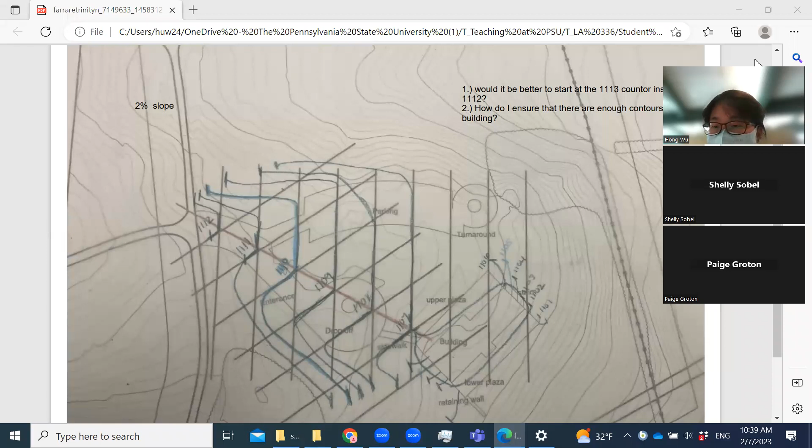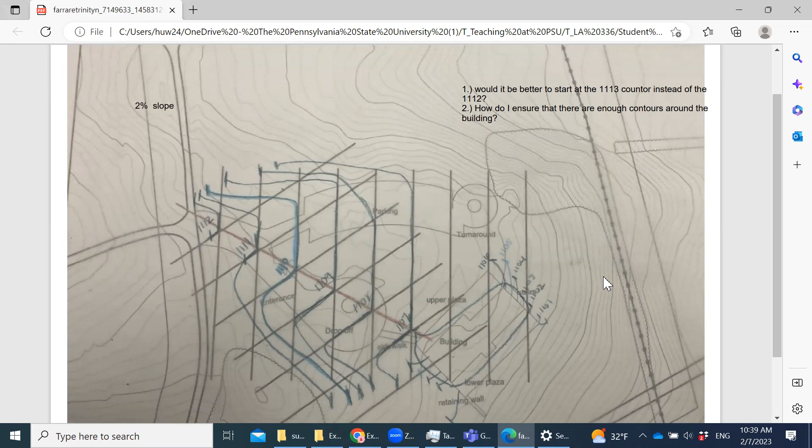Let me record. Then, sure. All right.

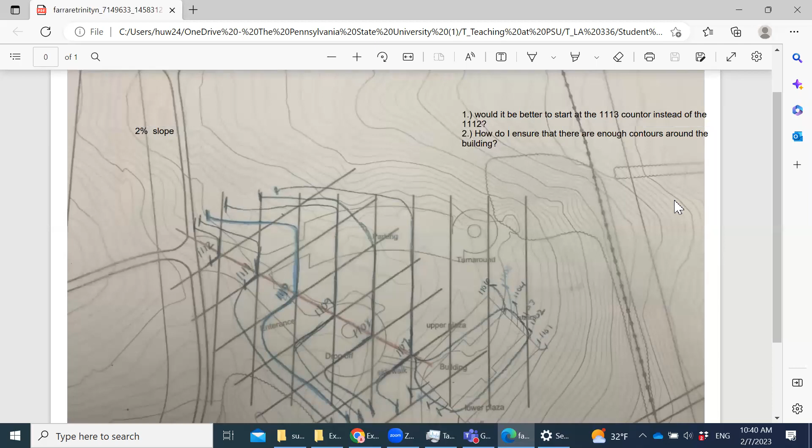Would it be better to start at the 1113 instead of the 1112? How do I ensure that there are enough contours around the buildings? Okay, so I want to try to understand first where... let me confirm that this is... did you start changing directions here? Yes, okay.

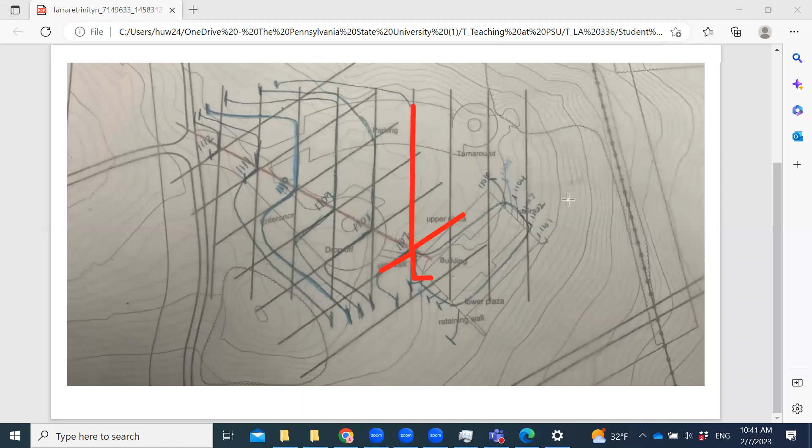If that's the case, and this is 07, you would have 97 at the bottom here, right? So the next contour off your lower plaza would be 96. So we'll see if 96 is over here. This is 95, is that right? Or that's 0.

If that's 0, then you actually need to connect from here to a 96, which is not a big issue, but this also means that you can raise your FFE so that the bottom would be higher, closer to the original 97 or 99, 98 over there, right? So that means, yes, you could make this 13. Starting with 13 would work.

Yeah, so then you would have 0, 8, and 8.5, 98.5 at the bottom here. Then it will be easier to connect to, as your top FFE, you have 0, 8.5, and bottom would be 98.5. Yeah, that's easier. Okay, so that's that.

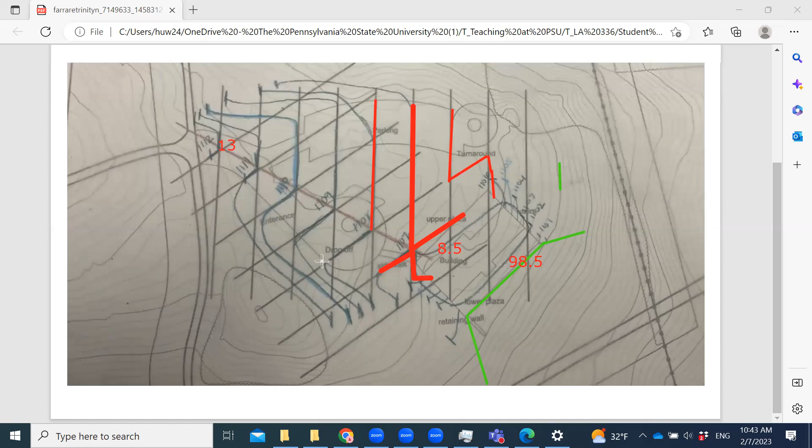That's correct. Then this goes like here, goes to here, there, and here. Well, once you get down to the driving aisle, it's okay to change directions, okay? But it's also fine to keep the ridge that you have right now.

When it turns out too difficult to connect to the original contour, you can be more flexible on the driving part, not the parking part. On the driving part, you can create a slight slope so it all slopes to one side. You don't necessarily have to create a crown in the middle of the road, but you don't seem to have this issue. All right. So the next problem is to connect to the correct contour.

I think we need to read the 12 here a little bit more carefully because there are two 12s. Now, if you remember in Stuart's example, there are two ways to connect 12 over here. This is 13. You have to close 13 for sure to make more room, right? This is 13 here. Yes, that's 13 here. So you could connect 12 back to this line.

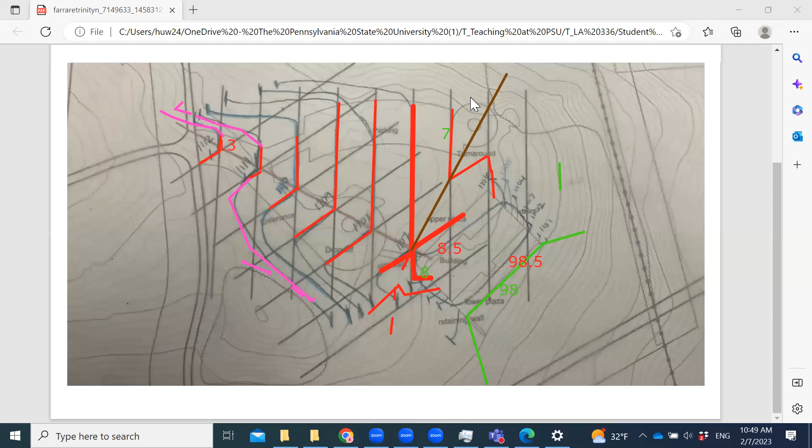And then it depends on whether or not you're getting down. Well, if the last line is over here, you don't have any other contour. So the 7 contour here is the last contour you would have on your parking lot, because you can see you don't have anything crossing, or you don't have enough space to create another 6 contour over there. So you don't have 6 on your turnaround.

Your turnaround is on a steep area and it's very close to the vegetation. So very likely you'll have to do some adjustments, like, okay, I need to round these. Let me change to another color. Need to round these. And then you have a center line in the middle like this, and your circle will need to align with your center line.

The turnaround here will be something like this. The extension of this line will go through the center of that turnaround. And this will also help move your turnaround away from the very steep area. Honestly, I think it's still pretty close to the vegetation.

So it might mean that everything here would need to rotate in this direction. You have a lot of space in between, so I'm not too worried about the possibility of rotating. You should be able to rotate it off the steep area. Okay. That's pretty much what I can comment on this submission. I think in terms of progress, this is appropriate.

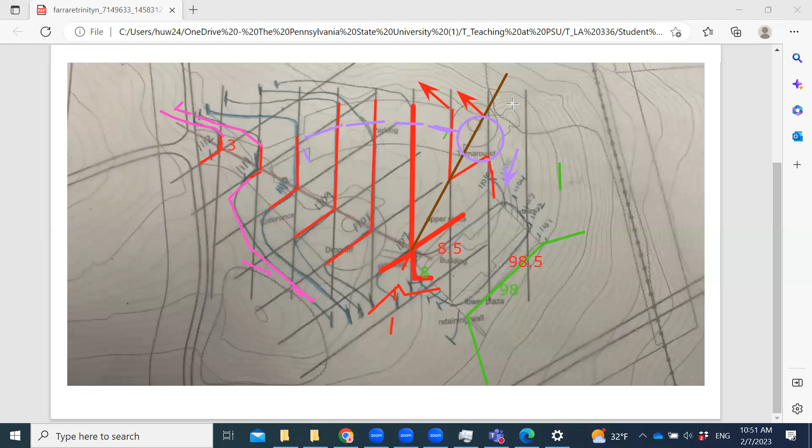Although a few more contours could be connected off here, right? In these areas there are still conflicts between existing and proposed, so those need to be connected. Always be mindful of the direction where the contours hit the wall. It should be like this instead of this way, okay? Because you're going to drain water onto the wall if that's the case. All right, so that's that.

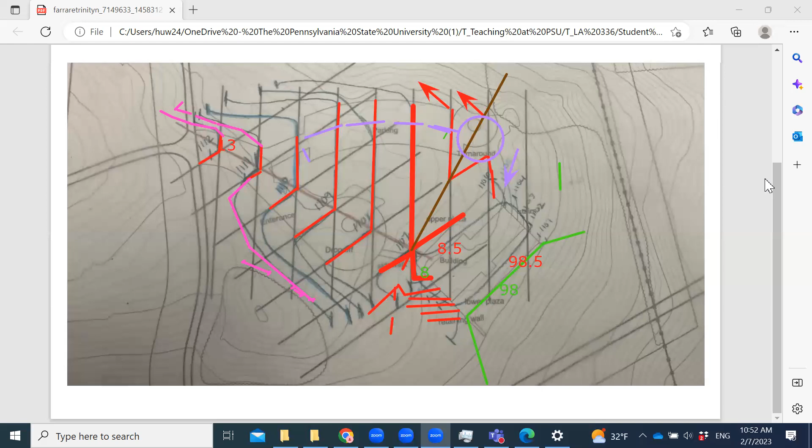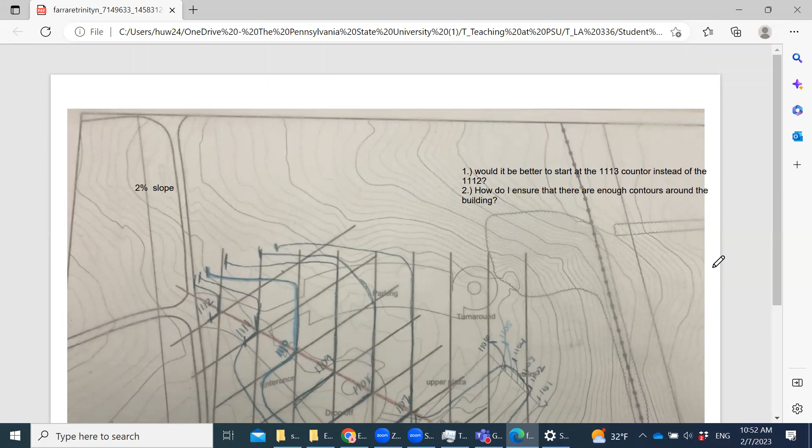Let me clear. I did save a screenshot here. Let me clear and then scroll up to see your remaining questions. I think I answered both of them. Anything else you want to go through? Okay. Good. All righty.

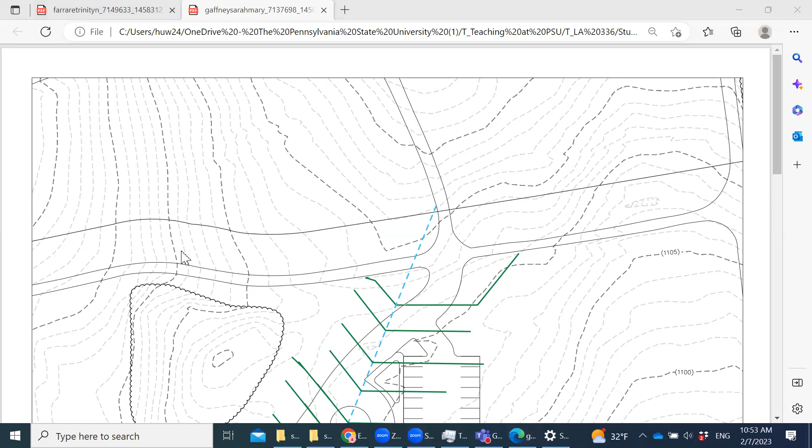So my next submission is Sarah. Is Sarah online? Let me go see. Oh, the other Sarah, yes. Let me see if she is in the main room. Well, not here yet. Trinity, if you can text her to let her know. Okay, thank you. Paige over here, I think you're online. I'm here. Yes.

So if you were here when I reviewed Trinity's drawing, we talked about how you want the top FFE to be relatively high, so that you will be closer to the original contours once you get down to the bottom of the backyard, right? So if your top FFE is 1104 and your bottom FFE is 94, it's going to be very hard for you to connect to 94 once you get to the backyard.

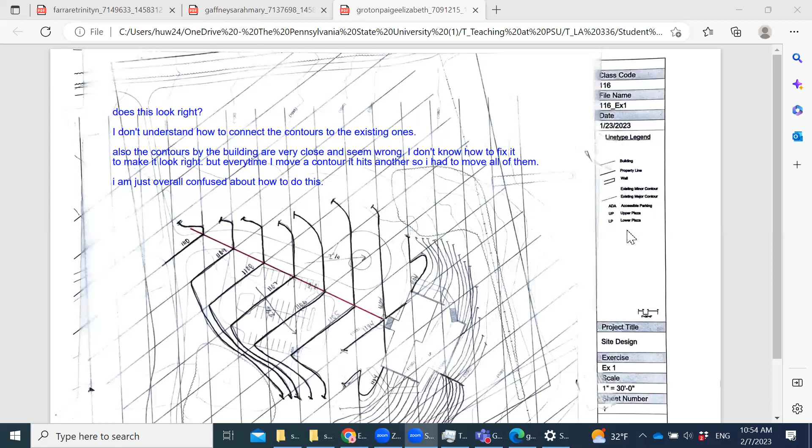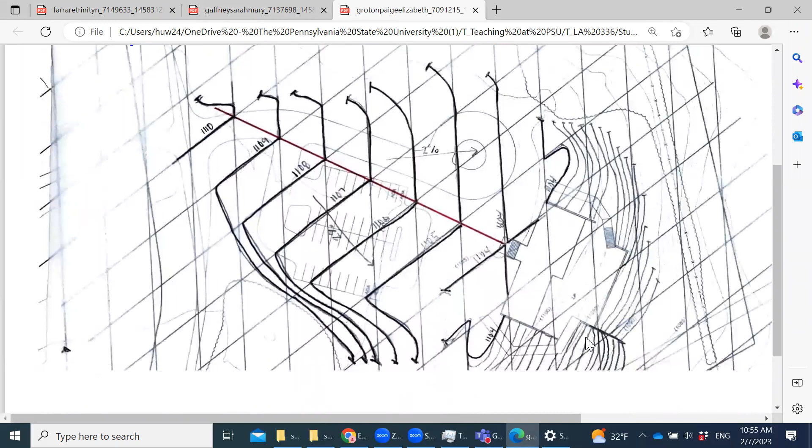So I could almost definitely say you could move your contours up at least 2 numbers, like you start with 1112 or even 1113. It depends on where your existing contours are. Okay, let me try to zoom in. It's not easy for me to see where 0 is, but I think 0 is this one. Feels like this is 0. That is 95.

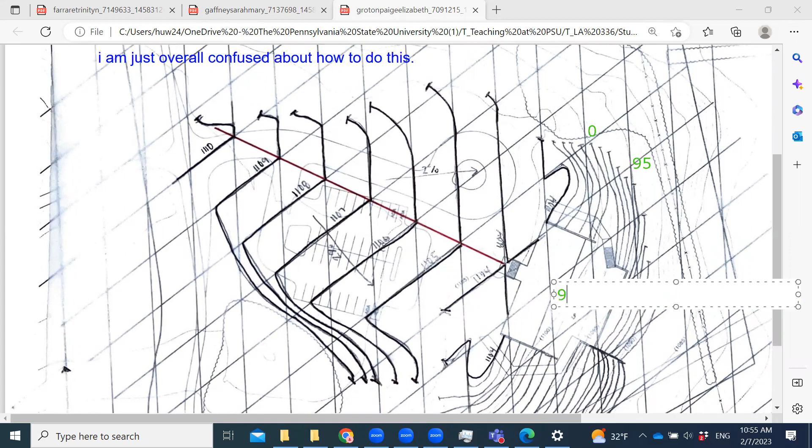And if you have 4.5 as your top FFE, your bottom here outside of the wall will be 94.5, so that your 94 will be somewhere here. That's your 94. And your 94 right now is over here. So roughly at this location, you're at about 97.

Okay, so if we can change by 3, if we can be 97 here, it will make your life easier later on. So let's say this is 1107 and 08, and all the way through, this is 1113. Does that make sense?

Okay, so the overall pattern, you should stop the pattern right at this point. I know you're trying to do that. This will make later grading a lot easier so that you have a lot of space in this area for your retention.

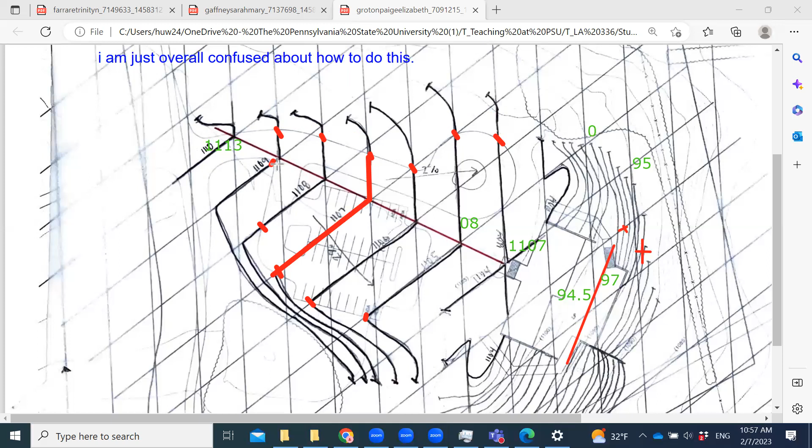Okay, so stop the grading, the grids, right at the edge of the pavement of the parking lot and the driveway. You don't have to extend it. If you would like to, you can. But if you're running out of room, stopping at the edge of the pavement is totally fine. Okay, and this line cannot stop just right here. It needs to keep going.

Well, I don't know where the original contour is. If it's over here, then I can see some conflicts between this line and that line. So most likely this line will keep going to shape a swale somewhere here. And then the next one is going to connect like that. And the next one is like this. So you can see there would be a swale going on like this.

Later on, not to worry about it right now, we'll ask you to create a swale, a diversion swale, in this area as well. I do think your parking lot is too close to the vegetation. It's already pretty hard for you to connect the contours. So later on, if we ask you to create a retention area, you won't have room. You can see water is draining this way, so you need a retention area here, and now there's not enough space to do that.

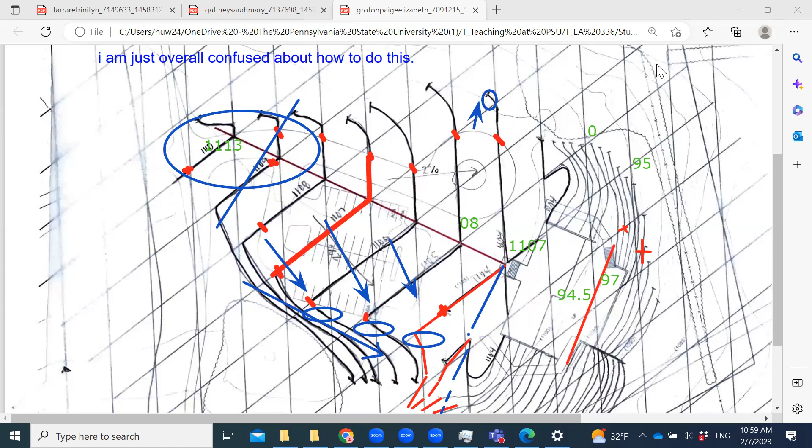Okay. For here, these look fine to me. These connections look fine in this area. We do need to try to connect back to these contours. Because I can't see the base map, it's very hard for me to see if the connections are correct, but I think you get the principle, so I'm not too worried about that. Okay, I'm gonna save this, and then I'll clear and take a look at your questions.

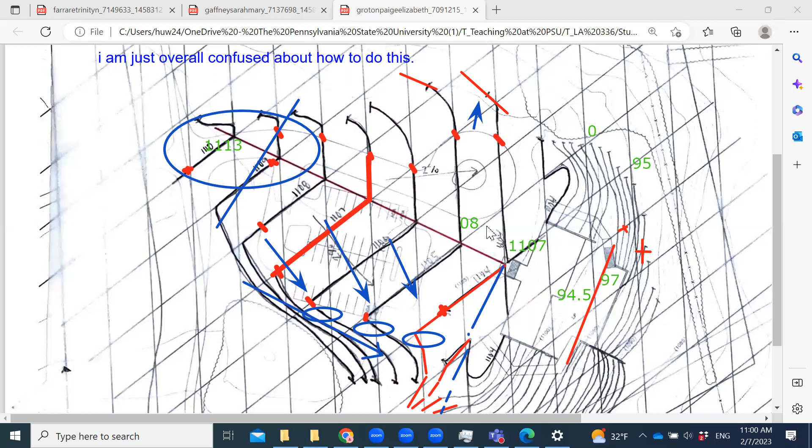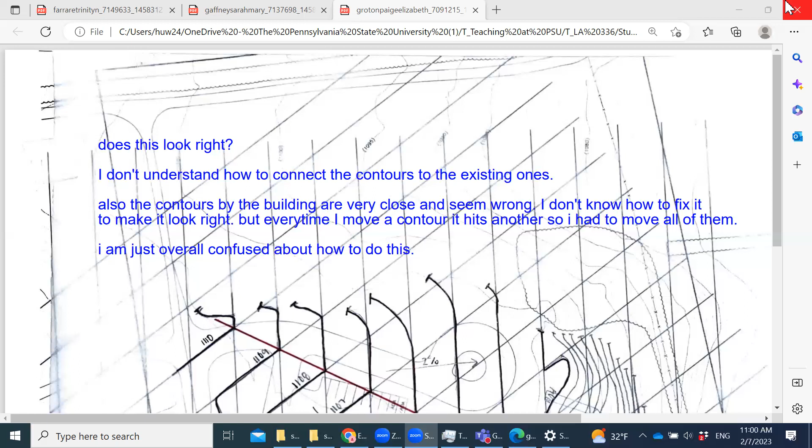I don't understand how to connect the contours to the existing ones. Very close, seem wrong, don't know how to fix it. I move a contour, it hits another, so I have to move it. Oh, just overall confused. Okay. Because it's hard to see the original contours, and once we change the contour numbers by 3, it is different. Yeah, I think I just started too low, so that's why it was so confusing for me. But once I change them higher, I think it will be better, because I understand what I'm doing now.

Yeah, if this is 7, the 6 will almost definitely require you to cut the 5 off here. So the 5 becomes like this. And your 6 needs to come in this direction. Oh, actually, this is not paved, so that's okay. And you come over here and then hit the wall. So that's your 6. And then you have another 5 going in, well, no. If that's 5, you can actually do this. 5 gets cut in this area, and then 5 continues like this. That's your 5.

So you can see this area is going to be pretty steep, but it's off pavement, so that's okay. The pavement in your plaza needs to be at 5, and your plaza area here can stay within 5, but once it gets into this area, you're steeper than 5. So the plaza wouldn't wrap around that much, and it doesn't have to. You only need to provide a plaza from your drop-off area to your entrance. So it's perfectly fine if you just have this flat area as your plaza. No plaza here. Does that make sense?

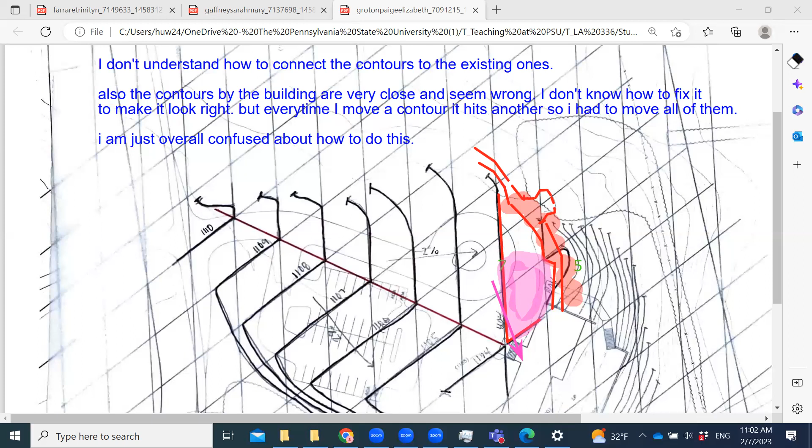Yeah. Okay, good. I think you get the idea as well. You just started too low. Once you bring it up, it will be much easier. Anything else you would like me to go through? That's it. Thank you. Okay, good.

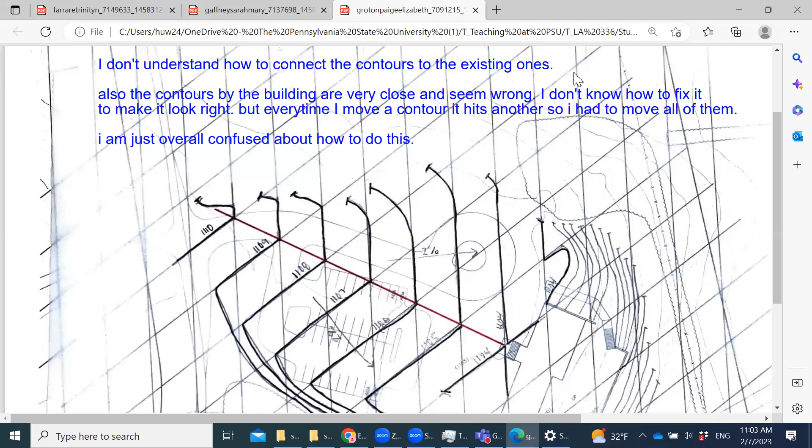All right. Is the first Sarah here? Not yet. Okay, let's look at, sorry, second Sarah.

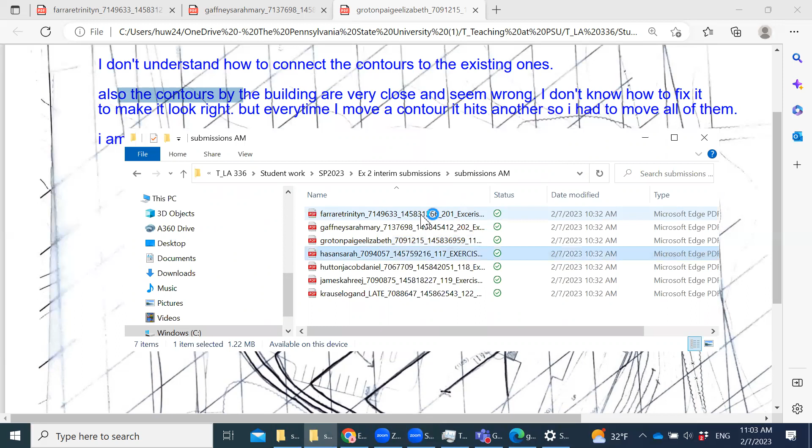Okay, out of the vegetation. So it feels like we have the same issue. We're starting too low, right? Right now here, the original elevation is at 11 or 12, even higher, 12 or 13. If we're starting at 112, 105, 105 is over here. So that's definitely too low.

So if that's the case, actually your bottom would be 89, right? 89 is out of the page. So we'll need to raise it by 8 or 7. Once you raise it by 8 or 7, then you would be, yeah. Now delete these contours, add a center line. Delete the contours at the center line. I'm not exactly sure what. Here.

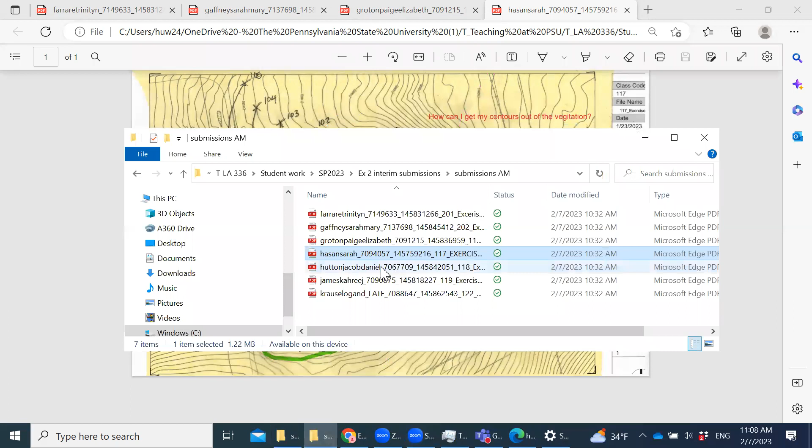All right, looking polished. So our ridge line goes, can you kind of see how your alignment of the ridge line is actually going against your existing topography? Yes. Yeah, so you would try to align, but I can see that you get the idea. You would try to align your ridge line this way. So rotate your ridge line so that it more or less aligns with the entrance, the road intersection here, and the front plaza, because you do want your front plaza to be sort of the intersection of that V, X pattern there.

So let's change to a different color. You would have things like this. And we can start with 13 over here. 13, 12, 11, 10, 9, 8. You might even want to try to do this. So the building direction. Okay, let's rotate a little bit more this way. I'm gonna try to move things. Yeah, I'm getting close to what you had before now.

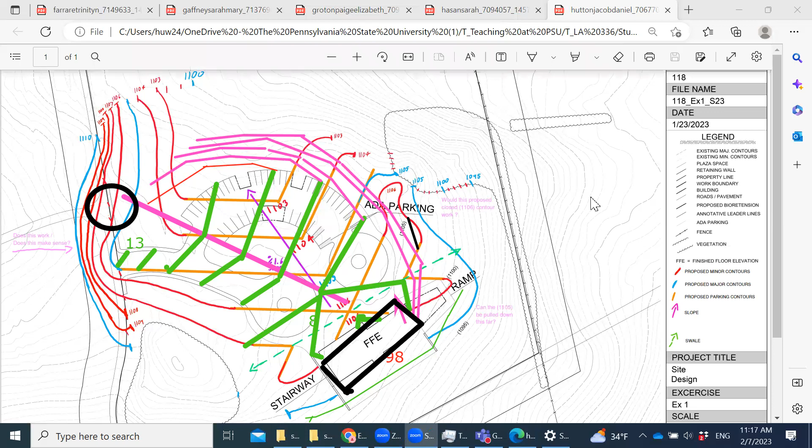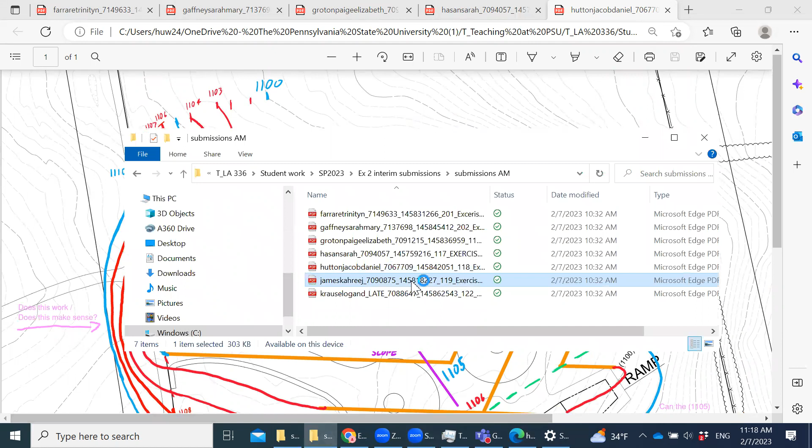Oh yeah, the 1106 wouldn't look like that anymore once you change your contour directions. Yeah, I think I answered about the road. But you went through every contour, so that's good. You went through once and we found some issues, we adjusted, but you used the same process to do the iteration. Okay, good work. Okay. Sorry. Yeah. Okay. Good.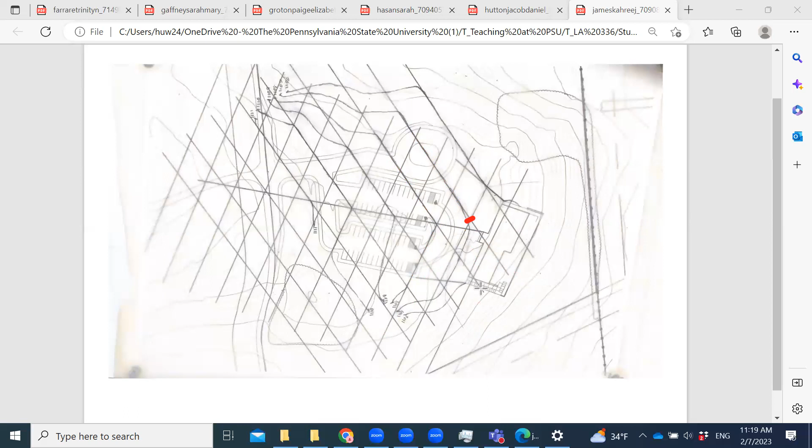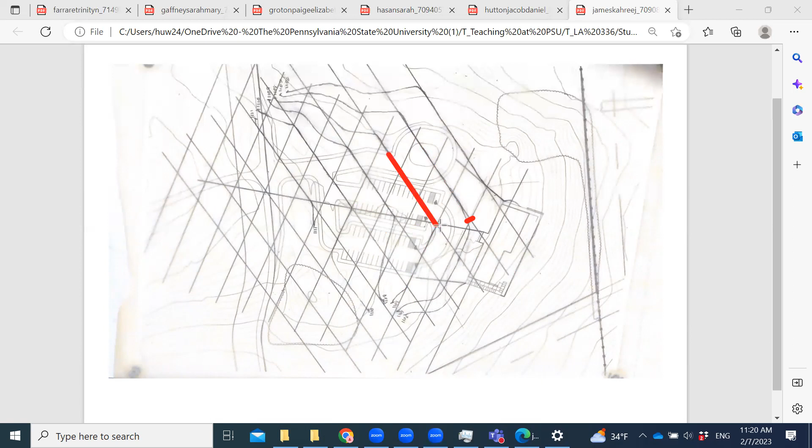We might want to check the last few lines. Let me clear. Can you see that this doesn't align with your ridge? Yeah. So that is the alignment there. That's the alignment there. Okay, yeah, it's fine. We can use what you have here to see if it's relatively easy to turn. So if we have the first line like this, the next line, yeah, if your center line's like that, your grid would actually look like this.

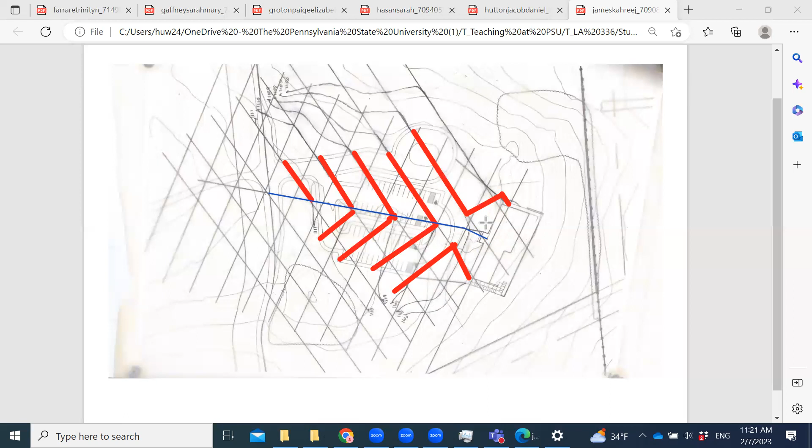Yeah, you don't need that anymore. You don't need this one. That's your first one. And then we would turn somewhere over here. Then we might just do something like this. Well, this would work. That one goes, actually, if that's the case, we would do a mirror. So my ridge is over here. Your ridge would turn, and this line is relatively in the middle of these two contours. Does that make sense? Yeah, and this is your swale. Okay. Yeah, this would work. We'll take a look at numbers.

Suppose we have 11 over here. Well, let's do 12. 12.

We again have an 8 and 98. And this is 0. It's close enough to a 98, so that would work. And you would have a pretty flat area here, which is good. Now you would have a flat area here and then turn to, that's your 7.

12 is close to this area. Close can be connected back here. This distance, it might just be enough to work. It might be just enough. If it's a few feet over, I think later on you can remove the walkway, because likely when folks see the building in a different direction, they won't use the walkway anymore. So you can reduce that walkway that you designed there.

And if that still doesn't give you enough between your parking lot edge to form a 25%, then you would need to move the whole thing slightly away from the vegetation. I wouldn't expect it to be a huge problem, but that could be a possibility. Okay. Depends on how far exactly the edge is from the vegetation. But overall, this grid would work. Yeah. Any other questions? Okay, good.

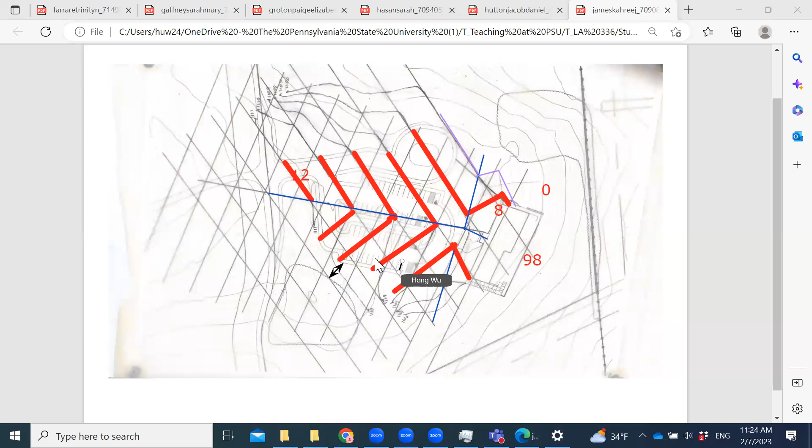Your base map design, I don't know if it's printing issues, but the parking stalls don't look perfectly perpendicular. So the parking spaces need to be perfectly perpendicular. They look like an angle close to 90, not exactly 90. I just wanted to double check that, okay? Don't make it parallel to your curb. Make it perpendicular to where the narrow end of the car is. Okay. All right, I'm gonna clear here.

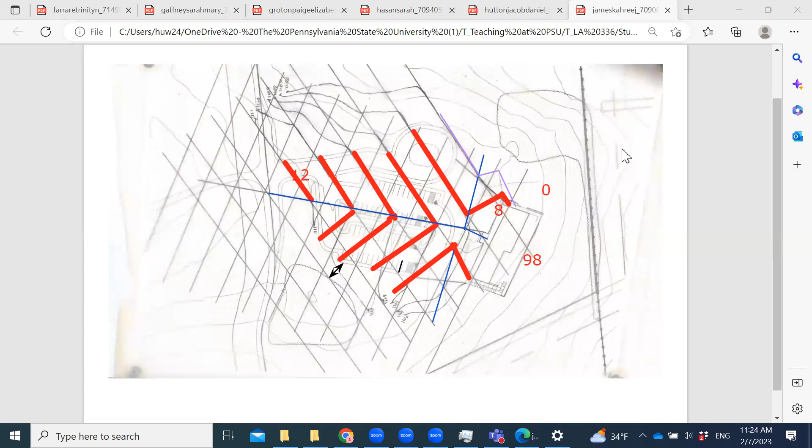Logan, see if you're online. Yeah, you're online. Can you unmute? Yeah, I'm here. Good. All right.

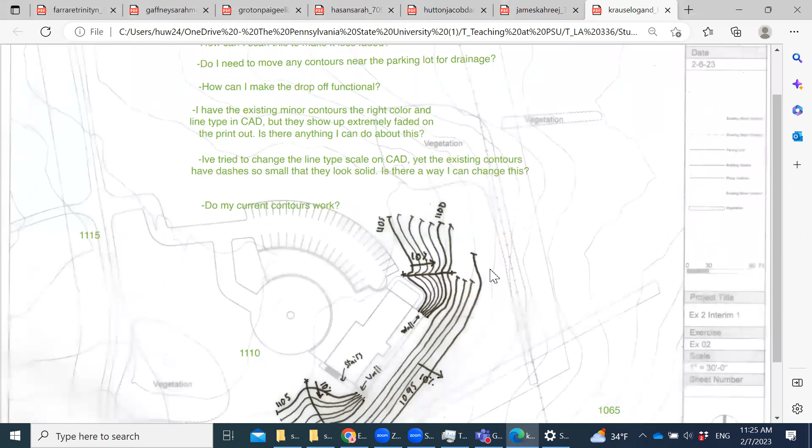So I currently don't see the grid yet. We'll need to start with the grid. You have your bottom and top FFE. I'm not exactly sure what your top FFE is. So it looks like the side contour, you started with 1105, which is a good estimation. You definitely would have a 1105 hitting the side wall of your building.

Right now, let's ignore the ramp and the stairs, because the ramp feature will cross your contours. It will change your contours once the surrounding steeper area hits the ramp. But eventually your 1105 needs to go hit the wall here. The 1105 hits your ramp, but it needs to continue to your wall. Then we'll worry about how the ramp changes your 1105 and the spacing between contours for the ramp portion later. Let's pretend for now the grading doesn't concern the ramp. So it has to end at the wall of the building, go around the building, and continue on the other side. So we will need to start with the grid for now.

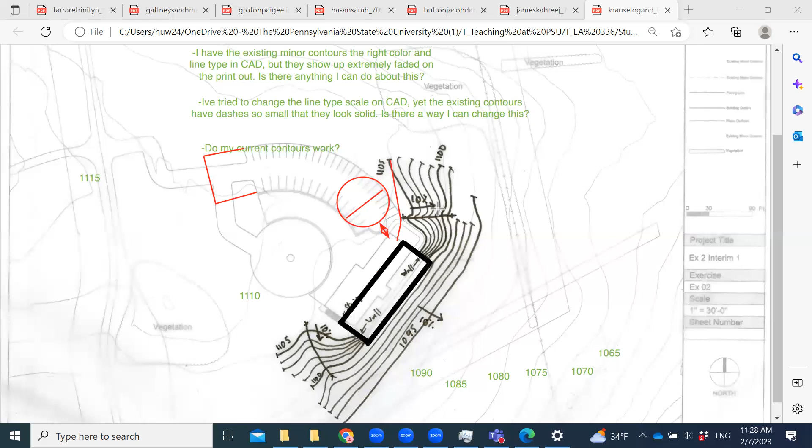Your turnaround doesn't work yet. You will need to extend your parking in this direction so that you have an area that is enough for your turnaround. Let me move this to around here. Your turnaround needs to be in this location, leaving some space between your turnaround and your building. This is still pretty small space. You may need to push your building back a tad, leaving 30 to 40 feet between your drop-off and your bus drop-off. That would be good spacing between these two features. Those need to be 30 feet. Okay.

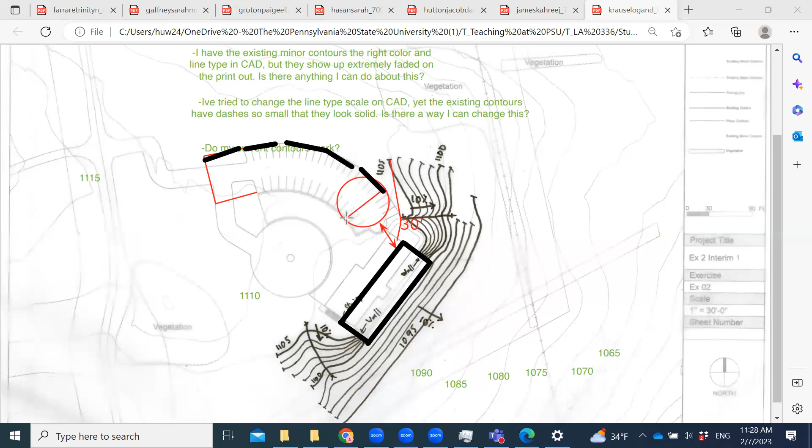All right. So then your parking will be extending, and the shorter side needs to be about 200 feet long, because 200 feet is 20 parking spaces per side, right? And then you start with the connection of the parking spaces to the road. Now center it. There are maybe a few options. Let me try connecting this first. Yeah, looks like it needs to be. Sorry, I'm drawing with my mouse, it's not very delicate. Okay. So it will look like this instead.

You would simplify the connections. Before, you had 1 turn, 2 turns, 3, and almost 4 here. Let's simplify it to just 1 for the bus drop-off and 1 for the parking spaces themselves. Makes sense? Yes. Would that be too close to the vegetation down there? If you have 30 feet over here, you would be fine. Even 25 would be fine, but let's try 30 for now. Try to keep this at 30, and it's pretty safe.

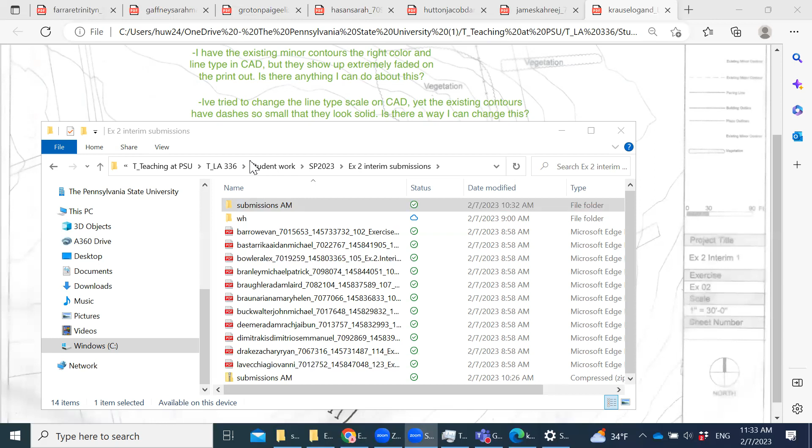I have a question. Okay, go ahead. So I haven't started yet, but when we go to do our grid, or the ridge line, does it matter which angle that we're doing it at? Or like you said, when you were doing Logan's, are we just trying to find whichever one works? Your ridge line, you would want to align that with the entrance of your driveway and the center of your plaza.

Because you can see this grid works the best when it's more balanced, right? The reason why we want it to end in the middle of the plaza is we want the grading to be relatively balanced between the two sides of the building. Now, it's not to say that it doesn't work if I have it here, that's okay too, but you will have a totally different pattern in front of your building. And here actually doesn't work because your swale goes into your building.

Does that make sense? Yeah, so basically it just makes it easier if you center it. Exactly. If you have your building over here, it makes it a lot easier to do something like this. So all the water will drain to the side like this. So make your ridge end relatively in the center of your plaza, starting the ridge roughly in this area at the start of your driveway. That will avoid having to rearrange the grid layout many times.

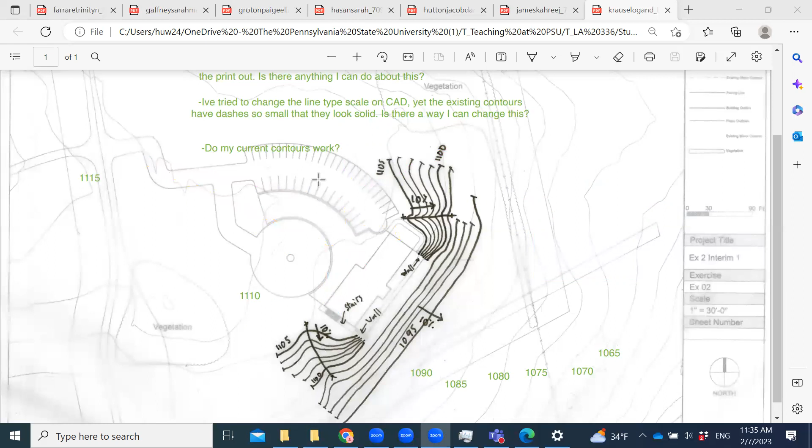Okay. And then when you have the contour lines that we were gonna draw in, they stop right at the edge of where the concrete ends. So at the top of the parking lot, it would just end there and then connect to the contour. Yes. Now, once you are off the pavement, you don't have to maintain that 2 to 5% slope anymore. So you end it at the end of the pavement, then you have more space.

You won't limit your contours. I can connect back from here. When this space is pretty limited, you don't want to connect like this, so all this space then wouldn't be able to accommodate other contours. Does that make sense? Mhm. Yeah, so you would want to end your grid at the edge of the pavement, leaving as much flexibility here as possible. Okay.